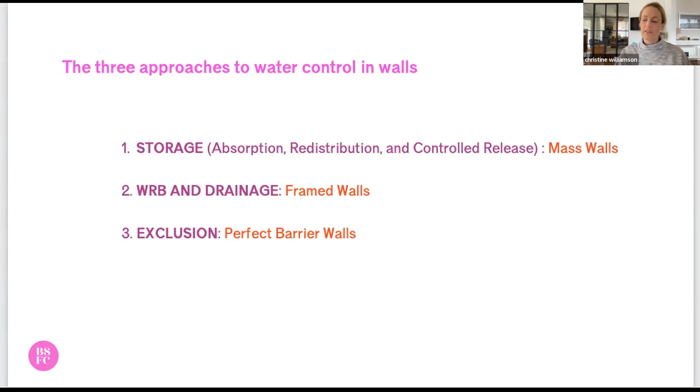With respect to storage, this approach involves the wall absorbing water, redistributing that water, and then releasing it by drying. This is how mass walls manage water. The mass wall gets wet, has an enormous capacity to store and redistribute that water safely, and then dries in both directions.

This is not so much in Philadelphia, but places like Florida. Coastal regions will do this. It's a little bit more common, even residentially.

And then, of course, we have fairly common composite walls with combinations of different kinds of stone and block. These walls are very durable. They are also heavy, like they literally weigh a lot. And they also tend to cost a lot, in part because they are so heavy. We seal windows, doors, and service penetrations to the exterior surface.

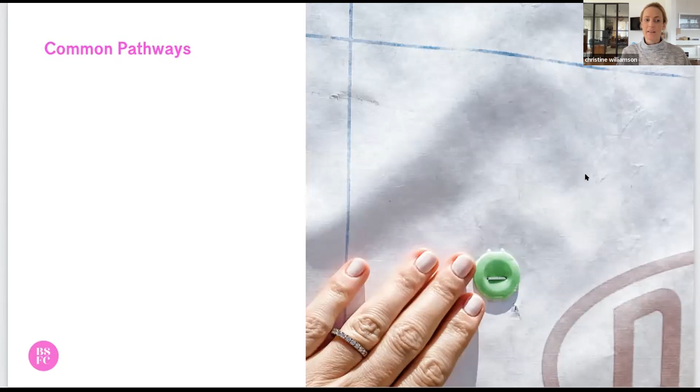Okay, common pathways, we talked about these. We don't have to picture them, although I will show you some. So fasteners that hold the WRB in place, fasteners that hold the sheathing in place, fasteners that hold the cladding in place. Most of these are not sealed.

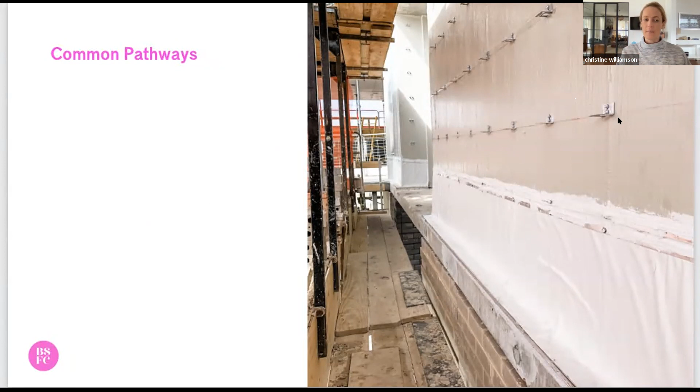We do not seal these. You could, I mean, some of them you could seal, every one of your brick ties. I don't think you should, but you could. A lot of times our claddings are blind fastened, so we can't even see them to seal them if we were to. Brick tie, what it looks like. Some people don't know.

Okay, let's talk about this third category here, common driving forces. So gravity is pretty obvious, right? If we've got a horizontal surface, like a low slope roof, and we have a hole in it, some penetration wasn't flashed properly, or a skylight wasn't detailed properly, and then it rains, that's pretty obvious. The force that drives water along that pathway is gravity.

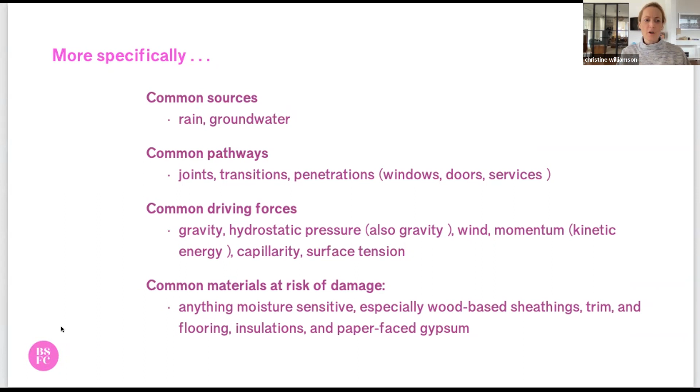So we get that, but some of these others are a little bit less obvious. Let's start with surface tension. This is the tendency of water to stick to a surface. The most common architectural example of this is water tracking back horizontally along a soffit or some architectural detail rather than dripping straight down due to gravity.

Typically this isn't a mechanism that causes most leaks, when we're talking about real failures of that kind. But we tend to care a lot about surface tension when it comes to stuff like staining. This comes into play.

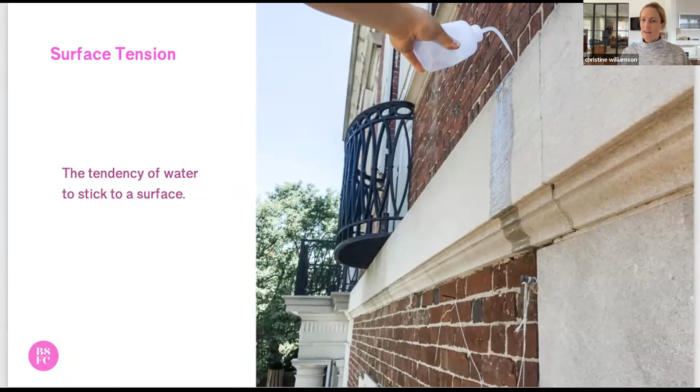The next driving force that's a little bit less obvious is capillary movement. It is the movement of water within the confined space of a porous material due to the attractive force of surface tension. So capillary action is actually a form of surface tension, just in very small spaces.

An example would be to dip a paper towel into a cup of water and watch the water wick through the paper towel. The same thing happens with all kinds of building materials, particularly cementitious building materials like brick, stucco, concrete, mortar.

Incidentally, it is also what brings water up to the tops of trees, right? Probably the first time you learned about capillary movement was in elementary school, learning about photosynthesis and trees and all that kind of stuff. So water from the ground will wick up through the roots and the trunks and the branches all the way to the tops of trees.

I find thinking of trees particularly useful when thinking about capillarity, because not only do we build with wood, we also intuitively know that trees can be very tall, which is a powerful indication of the magnitude of capillary transfer. We should not underestimate this. This is a very effective way of moving water from one place to another, and it's very common in the materials that we build with.

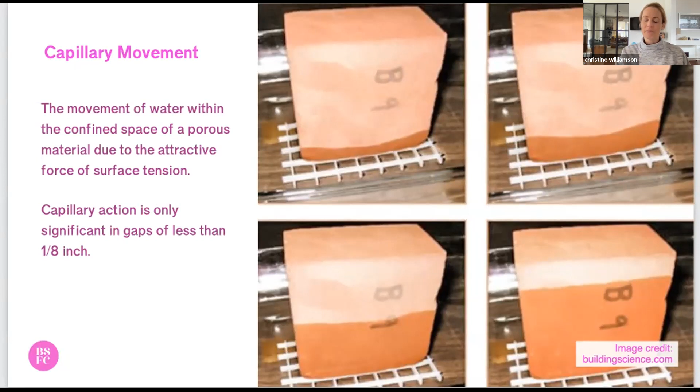The big money one, this is the concept that I wish architects had a really good handle on. I think it would help them a great deal professionally, is hydrostatic pressure. It is an extremely important transport mechanism for liquid water. You'll want to take some time to understand this, but it only seems complicated, don't worry.

So hydrostatic pressure is actually really gravity. It's just sort of a special kind of gravity. It is the pressure that water exerts against a surface when it is held up against that surface.

In order to determine specifically what that pressure is, there is an equation. You will not have to do the math, but it does benefit you to see it. Pressure at any given point on the dam is equal to the density of the fluid, times the acceleration from gravity, the gravitational constant, times the height of the column—so where we are vertically on that dam.

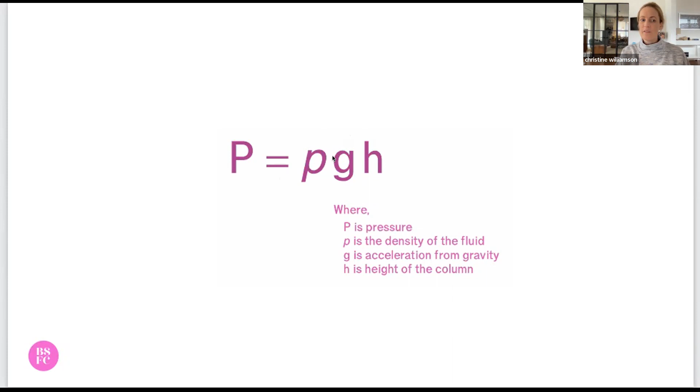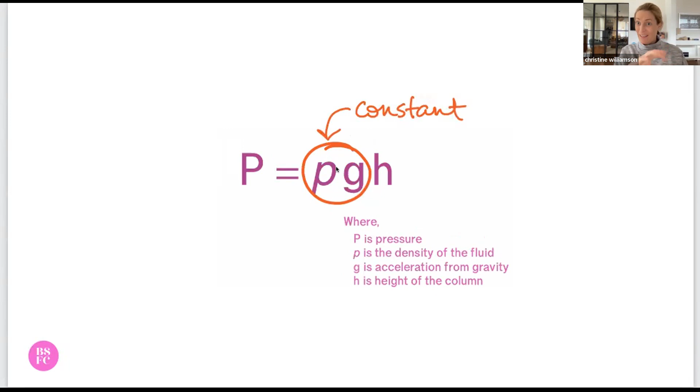You'll notice something interesting here: two of these things, at least on Earth, are the same. We know the density of the fluid we're most concerned with, water. We know the gravitational constant. So the only variable in this application that really varies is the height, where we are on the dam. What's kind of neat is that the pressure is entirely dependent on where we are expressed vertically.

So the size of the lake doesn't actually bear on the magnitude of the pressure at all, but the depth of the lake does, which is crazy, right?

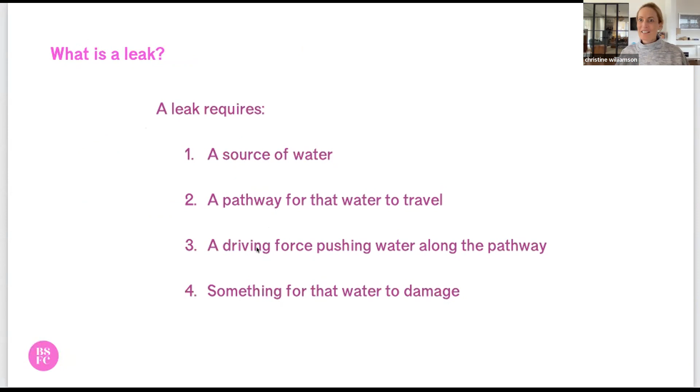Now, in most applications, the volume of water we're dealing with obviously matters. If we go back to our leak, we can have a source of water, a pathway, and a driving force, all three of these things. But if the source of water is very small—if we have a pathway and a driving force, but our roof leaks, say a skylight that hasn't been finished yet, and we get a very light, brief rain—that's obviously less of a big deal than a downpour. So the volume does end up mattering to us, but it doesn't affect the magnitude of the pressure. It's just the height.

So what this means is that the pressure Lake Mead exerts on the Hoover Dam, one inch below the surface of the water, is the same as the pressure my water exerts on the plastic bottle one inch below the surface. Isn't that crazy? It's kind of nuts. That part's not intuitive to me.

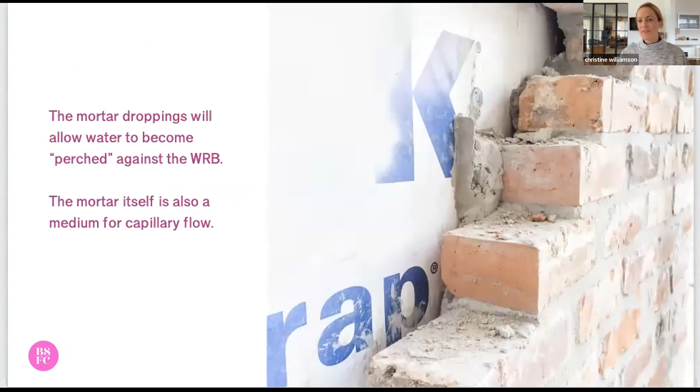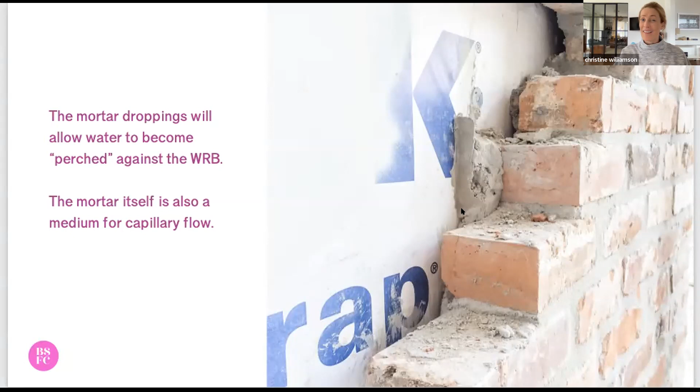But anyway, architecturally, how does this end up mattering to us? It matters in stuff like this, and this is where we'll come back to our drained wall in a moment. When we have a cladding and a space behind it, and that space is for some reason clogged up, we allow water to become what's called perched against our water control membrane. And when we do that, hydrostatic pressure develops—the more water we allow to become perched, the more pressure driving that water to the interior there'll be. We permit, or we provide, a driving force to bring water to the interior of our buildings.

In this example, we've got a masonry veneer with a very standard residential one-inch cavity behind it, with a mechanically attached water control membrane. You don't see it in the photo, but we can presume we've got a wood-based sheathing like OSB, wood framing, cavity insulation, and painted drywall on the interior. So we have all of these things in that example.

We've got a source of water, rain. We've got pathways—what are our pathways? We've got capillary action, or porous materials here that have pathways. Then you can kind of see the cap nail that's holding the sheathing in place, and we don't see it here, but I think maybe there's brick ties as well, or other pathways.

Our driving forces are capillary action through the brick itself and through the mortar, which will deliver water from the face of the brick to the back side of the brick. Then we've got this mortar in the middle that does two things for us: one, it's a medium for capillary flow, and the other is that it allows water to become perched and produces hydrostatic pressure, driving water to the interior. And then, of course, we have all kinds of things behind the WRB that can be damaged as a result. So yes, we have a problem with this.

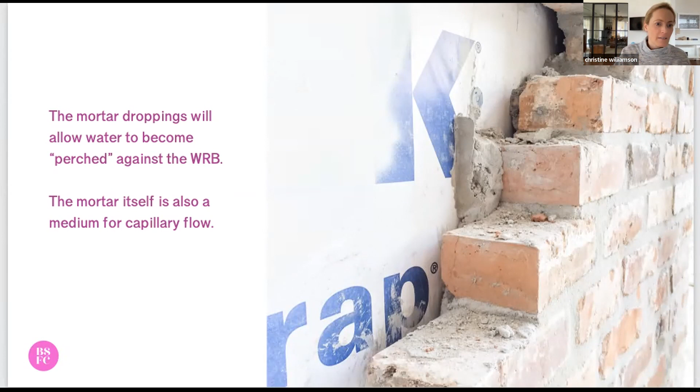And the easiest thing that we could do to make this wall work is, of course, to make this space actually clear. It's really hard to do that residentially when we only have a 1 inch cavity. Commercially, let's see if I have a picture of a commercial wall. The cavities tend to be larger, 2 inches. In my experience, it's pretty reasonable to ask a mason to keep a 2 inch cavity clear. They can do that pretty well. But in residential construction, keeping a 1 inch cavity clear is very, very difficult.

So I recommend that all my clients use either a drainage mat in there, most typically, or a textured building wrap or something else to give us a little bit of a space for drainage and drying.

Now, I'm going to show you some examples very quickly, because I want to leave lots and lots of time for questions. I'm going to show you 2 more things and then questions and discussion, not just questions, discussion too. I'm going to show you some examples of what stuff looks like when it fails. And then I want to talk about our 3 strategies again in the context of what we've just gone through.

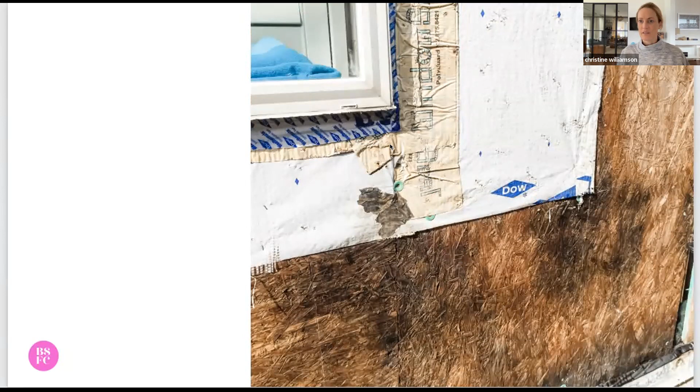So this is what insufficient drainage and drying looks like. This is a townhouse in Houston. It used to have a stucco cladding on it, and there just wasn't enough drainage. It was a code compliant building, just not enough drainage. It was so wet, and this was after approximately 5 years. It's pretty much just disintegrated. This was not a leaking window. This problem was not how the window was flashed or installed. The problem was insufficient drainage.

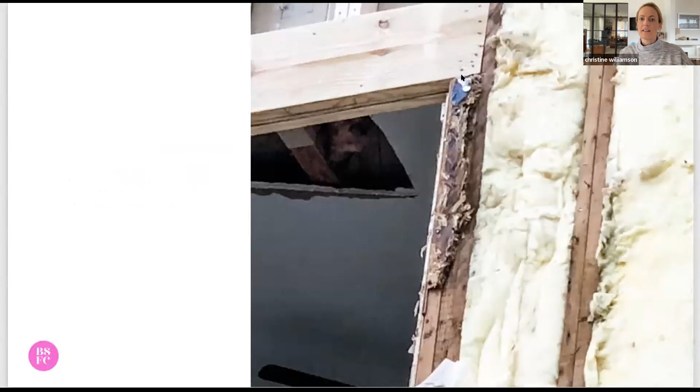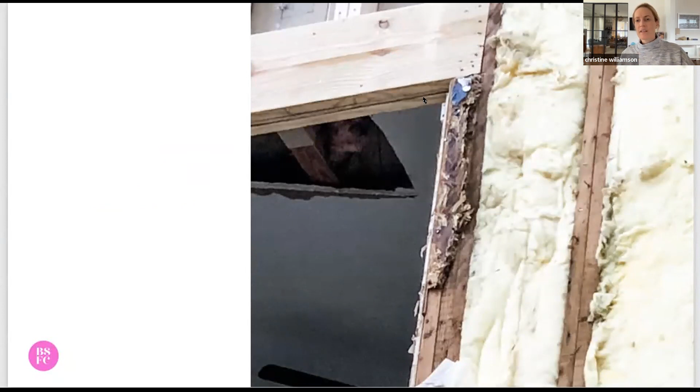So the sheathing was completely rotten, and you can see, this is a closer view. You can see a little, this is the clearly visibly wet OSB sheathing and a tiny little square of building paper left over. I've been using this example to teach with for a long time, and I actually ended up socially meeting the owner of this. And what's crazy is they went back, because my dry cleaners is there, I kept track of it. When they were repairing it, they repaired it with the same system that failed, with insufficient drainage.

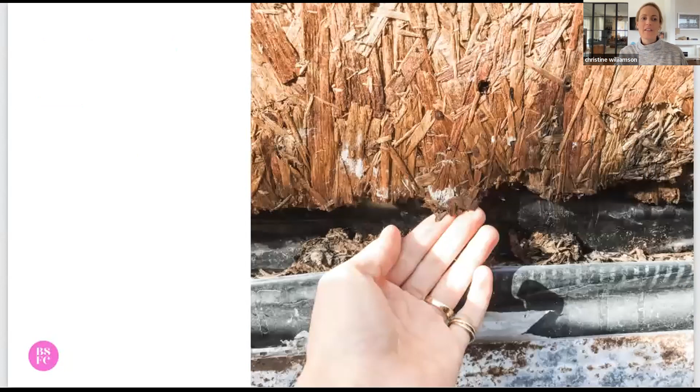It's that the building code requires only 2 layers of building paper, and that is not enough drainage. So the first layer of building paper required by the code is the water control layer. And the second layer of building paper is designed to give us just a little bit of a gap for drainage and drying. That's a huge source of misunderstanding, by the way, in our industry, where we sort of assume, oh, well, we have all these failures, it must be that the water control layer, there's something defective about the installation of that WRB. There's nothing wrong with the installation of the WRB. It's this. It's driving forces.

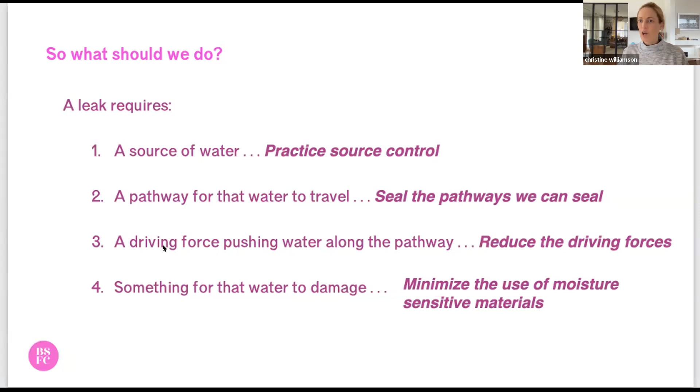We have a water control membrane that would work fine. And in fact, there is no commercially available water control membrane that is robust enough to resist hydrostatic pressure. We have to do all of these things on this list. We cannot just do one of them. Dealing with the driving forces is part of our responsibility. Our WRB cannot work properly unless we deal with these driving forces. So these two layers of building paper, we don't have the second layer because the first layer isn't up to the task. We specify the second layer to deal with the driving forces, to give us a space for drainage and drying.

And that brings us right back here again. I'd like to point out that one of the biggest things people miss with these three approaches, and in particular this drained approach, is that they fail to see this as a system.

This is a system. Our WRB is not designed to work by itself. The system depends on having a water control membrane, an airspace for drainage and drying in front of it, and a cladding that sheds water. All three of these things participate in the water management of the system. The WRB isn't there because our cladding isn't up to the task.

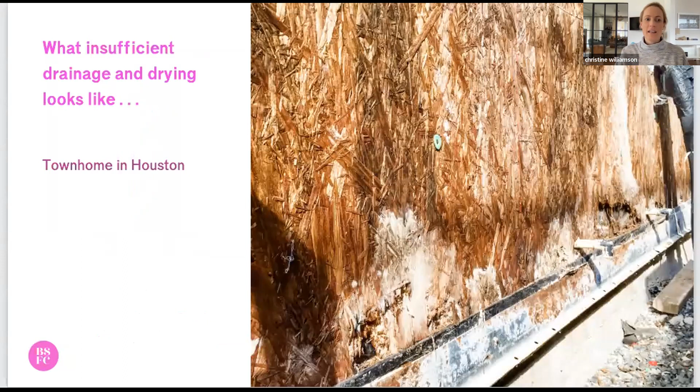These failures are not installation failures from crappy stucco installers or whatever the cladding system is. Cladding isn't designed to be a perfect barrier to water. In a drained assembly, we're dealing with a system, and paying attention to each component of the system is extremely important.

That's really what I want to leave you with. I think it's the most natural, practical application of this. So now I've taken you here, and the first thing I would ask is, okay, I know I need a WRB, we got that, I know I need a space for drainage and drying. How big a space do I need?

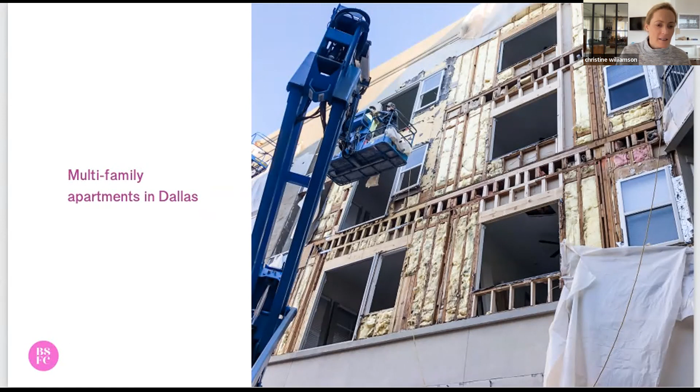That's a much more complicated question, and it's one we don't have time to fully explore, so I'm going to give you some rules of thumb to help. Let's see, give me just a moment to find the slide that summarizes it for you.

Okay, so how much of a gap do we need? In climates that receive 20 inches of rain or more per year, and on buildings more than 2 stories, I recommend a clear space of about 1/4 inch behind reservoir claddings like brick, stucco, and adhered stone. Reservoir claddings are those claddings that hold a lot of water.

Vinyl siding, for example, is a non-reservoir cladding, and a metal panel is a non-reservoir cladding, but cedar would be a reservoir cladding. Any kind of unpainted wood would be a reservoir cladding. 3/16 inch gaps work nicely on lower exposure buildings and on non-reservoir claddings, so panel and lap sidings. In buildings with exterior insulation, I recommend a 32nd of an inch behind the insulation, or using a drainable insulation, and an 1/8 to 1/4 inch in front of the insulation. This is my general rule of thumb.

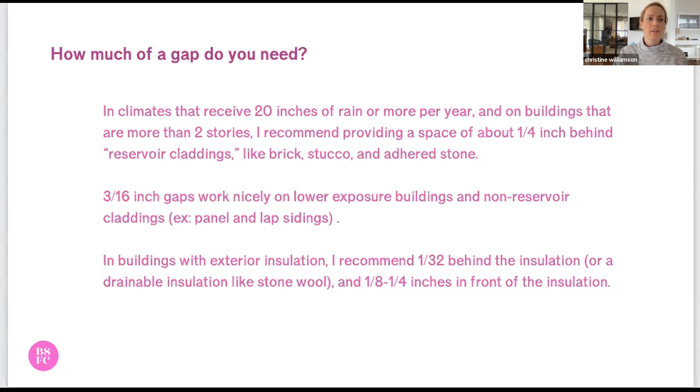This is a more complicated question, and I'll tell you why very briefly: we don't actually need a very big space to deal with hydrostatic pressure, we need a very small space. What we tend to need when we need a bigger space is actually usually for drying.

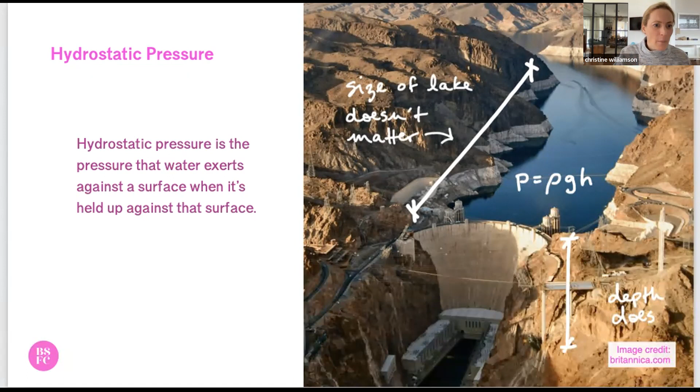When we have reservoir claddings, what we like to see is drying into this cavity by both the cladding and the wall, and a bigger cavity provides more drying. There are a few factors that affect this, and we don't have time to explore all the options here, but that's why reservoir claddings tend to require a larger space, because we want to dry them out into the space before the sun comes out and drives all that water vapor into our walls. But again, that's for another day.

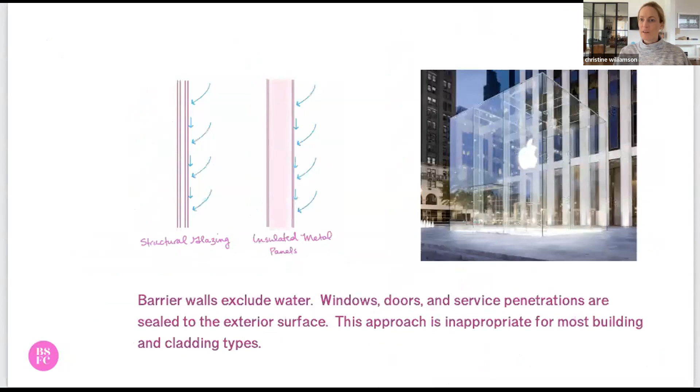What I really want to leave you with is the importance of understanding our three approaches to water management: mass walls, drained walls, and perfect barrier walls, understanding them as a system of water management that is dependent on the rate of wetting, the rate of drying, and the capacity for safe storage. Achieving the right balance requires attentive design and a nuanced understanding of how our walls actually perform in service.

And with that, I'd love to open it up. I'm going to stop screen sharing, I might share again if you guys have certain questions, but I want to look at the chat. Eli, maybe you want to MC this section here. How do you want to handle discussion?

Absolutely, I'm happy to. I think one question that was coming up was about exit strategies, which you started to talk about at the end, and in addition, how do you get drying? You talked about both top and bottom. Can you talk a little more about those exit strategies and approaches?

Sure, yeah, okay, so now I will share this again. Let's do this, see if it's exactly where it is. Yes, okay, so we've got a space behind our cladding for drainage and drying.

Well, now what do we do? Now we've got this clear space. How do we actually get that water back safely to the exterior? We provide what's called through wall flashings.

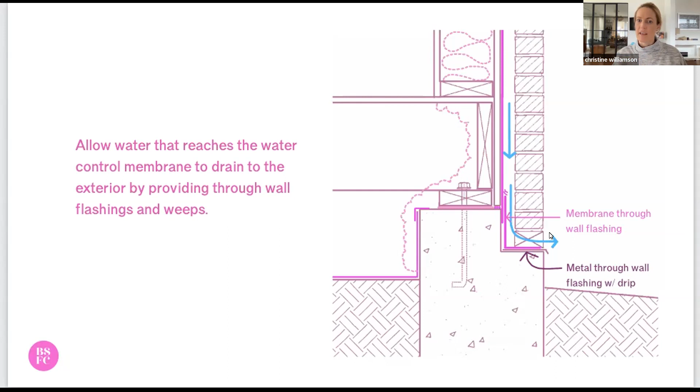When we have a brick veneer, we provide through wall flashings. My favorite approach is to have a metal through wall flashing, a combination of metal and membrane. This membrane strips the flashing to the face of the water control membrane, and I let water drain out. This X'd out brick is called a weep and a vent, which does both things. It allows water out and also allows air in.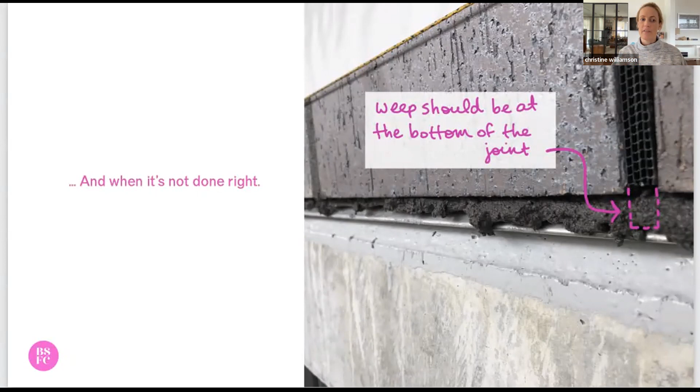Typically we don't handle this with the care that I see here - this is not rare, but often through wall flashings aren't done as well. Residentially, we see a lot of this, where you get some weeps and you're using whatever this is - polyethylene, or sometimes visqueen, some sort of plasticky material that doesn't bond super well to the mortar, so you get a little bit of drainage there. This will drain, but it's pretty sloppy, and I don't like relying on it. It does work, but it's sloppy.

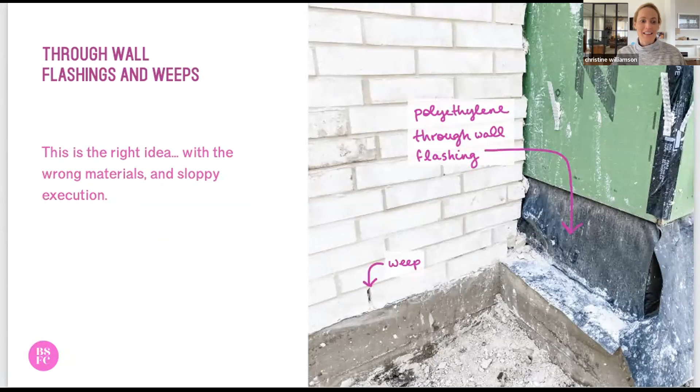People also tell me they don't like the look of this. A lot of architects say, I don't like the look of this, it's so industrial, and I agree - I don't like the look of this either. But compared to what? Most of the time, we're not actually doing anything at all. If you actually start looking at this stuff, there's so much ugly stuff out there. We just don't see it because there are shrubs here.

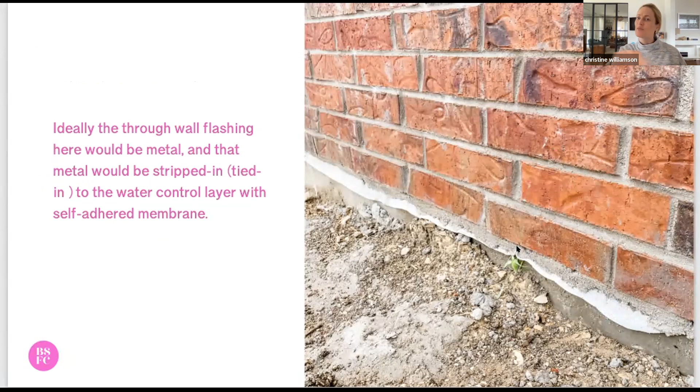Anyway, the worst through wall flashing is no through wall flashing at all. And the joke is: weep now or weep later. Sort of cheesy, but you can see here, there was no through wall flashing designed in this wall.

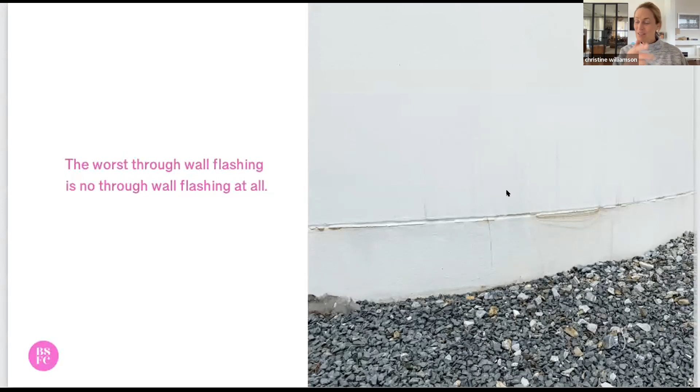There's a whole bunch of water in this building. This is a house that did not find its way out. Guess where that water is? It's rotting and molding that house. So yeah, weep now or weep later.

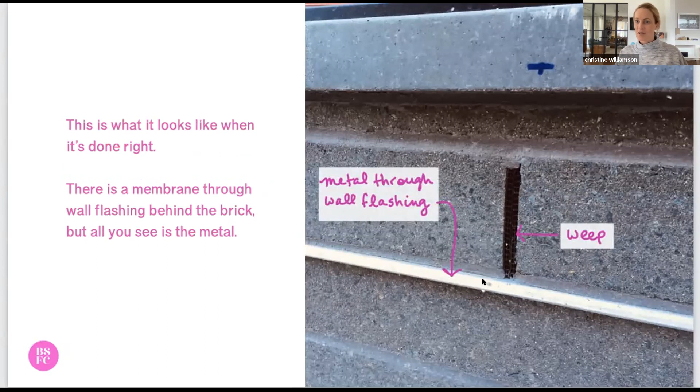But there's stuff to be done to make this more architecturally appealing. You don't have to use stainless steel - you can use other metals, painted aluminum, or copper. There are ways of designing this to make it look less industrial. But for goodness sake, we can do better than this and this.

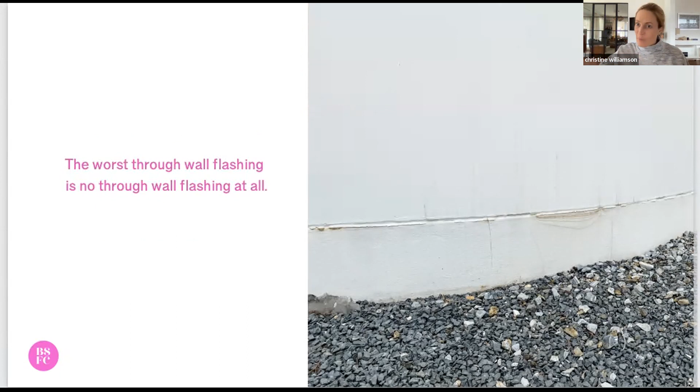The second part of this is getting water out from behind our claddings. Often this is really easy.

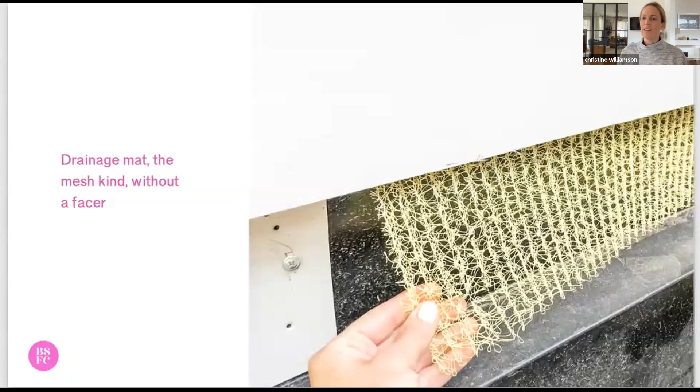Like with a panel siding, the photo is a little washed out, but this is a panel siding and a drainage mat behind it. It's just a little bitty metal through-wall flashing piece with a drip that lets water out. It's very subtle, you barely see it. That's this here. When the next panel is installed, you have to be a real geek looking for it to even perceive that it's there.

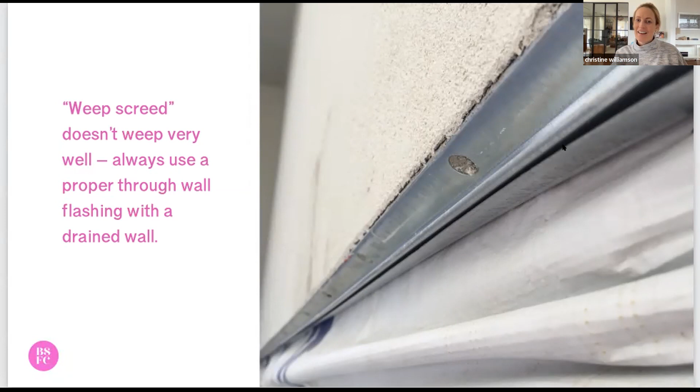With stucco claddings, I don't like to rely on the weep screed because it gets filled with mortar. So I treat the weep screed just like a cladding termination, and I have a separate through-wall flashing here. You have to get on your belly to take this photo. So these things are usually pretty subtle. Or this one doesn't even have a drip edge.

It has a drainage mat behind the weep screed and it just drains. We're not dealing with a lot of water - we're dealing with enough water to damage our wall, but not enough water. We're not gushing out here.

So we just need to take the edge off. And then of course, at the top of the wall, I don't have an image to show you, but I do have a sketch. The best approach is to not just provide weeps, but to also provide vents - some sort of air outlet at the top.

Now in brick, we use the very same weeps that we use for drainage are also vents, and we put them in at the top the same way. It's pretty easy, very subtle, but there's lots and lots of ways to approach this with other cladding types. A lot of times it happens without us even specifically designing it.

We only need very small spaces to get good air exchange behind many of our claddings - like a 1/16 of an inch, a 1/4 of an inch. We don't need a very big space to make this happen, we just need to take the edge off. The critical part is making sure that this space is clear. That's where we tend to struggle the most.

So a question about the code - you mentioned the project in Dallas that was code compliant, yet the system itself was insufficient. That's the code in Philadelphia too. So how does that code change? What kicks off a code change that could update that?

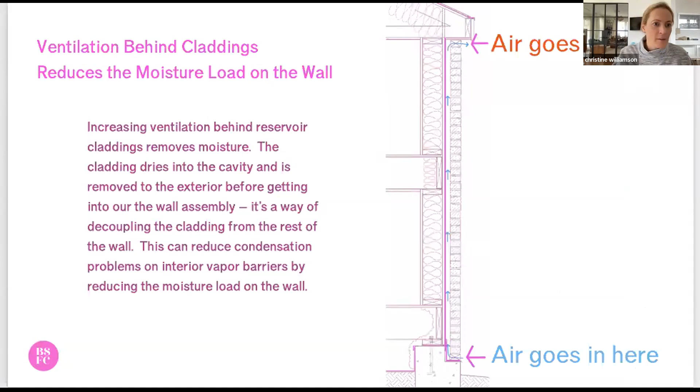Okay, so it depends—it always depends. Are we dealing with a full mass wall that's been stuccoed, or just a veneer that's been stuccoed? Stucco is actually a really fantastic water management tool. Historically—let me share my screen again—there's absolutely nothing wrong with this. Often we put stucco renders on solid masonry walls.

You see this all over Europe, and they're doing it as a water management tool. They'll put the stucco on the solid masonry wall using less expensive masonry. We picked the stone specifically for this very special building, and we want it to look amazing forever. But a lot of masonry buildings just need to stand up—they're not churches, museums, or art galleries, these institutional buildings we invest in that way.

As a durability measure, we'll put a stucco render right on top, and then redo the stucco all the time—every 20, 30, 40 years, whatever it is. There's nothing wrong with that. And painting the stucco as well reduces how wet the wall gets in the first place.

So suppose you had a masonry wall that was in bad shape and you wanted to insulate it from the interior, but you were worried about how it was managing water on the exterior. One strategy would be to reduce wetting by applying a stucco render as part of your retrofit. You can do that on a veneer wall too, and it will reduce wetting, particularly if it's painted.

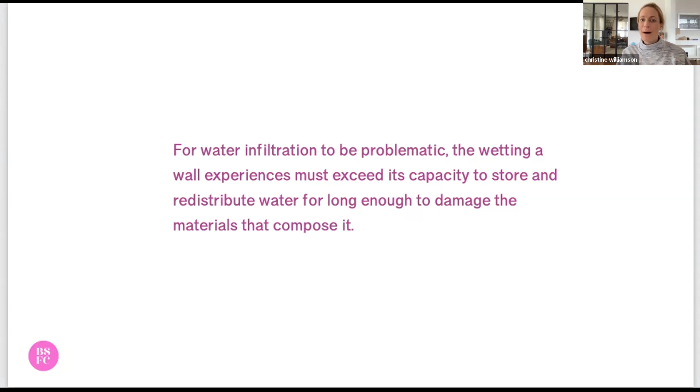This is what we're doing—wetting, drying, and safe storage. But you can't just reduce the wetting with a veneer wall; you still have to address the underlying issue of drainage behind your veneer. So it depends on which of these: is this a mass wall that's got stucco, or a veneer wall that's been stuccoed? If it's a veneer wall, your stucco might take the edge off some of the wetting, but it's still a reservoir cladding and a drained assembly that depends on having a space for drainage and drying behind it.

This is a really hot topic in historic neighborhoods too. I live in one, and there's always people who lament anybody who paints brick. I think it's outlawed in my neighborhood. My house isn't brick, so I haven't paid attention, but people will say painting brick is bad for the brick. It's not bad for the brick. You might not like it, but that's a different argument.

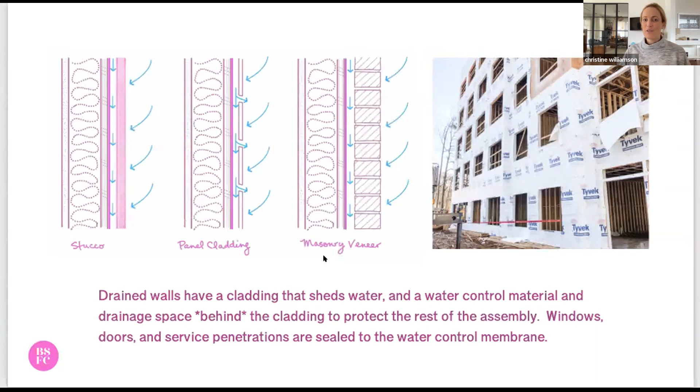If you paint brick, it does reduce how wet that brick will get and how wet it will stay. You have to use a vapor open paint, because your paint will not be perfect. You will get water behind your paint, and it will need to dry in both directions. When it dries out, it will blister the paint or coating if it's too vapor closed. Now, if there are other reasons to debate this - if you start painting or stuccoing over something, you've created a new thing you now have to maintain, and that may not be desirable. It might change the character of the neighborhood in a way you don't like. There's plenty of other reasons to debate this, but as a water management strategy, it can be very effective.

So getting to Libby's question on 18th and 19th century buildings - I wish Zoom didn't move the chat every time the screen stopped sharing.

Looking for resources for studying 18th and 19th century buildings that have been documented with leaks - any books, articles, sources that talk about how water and large scale, specifically brick buildings, interact?

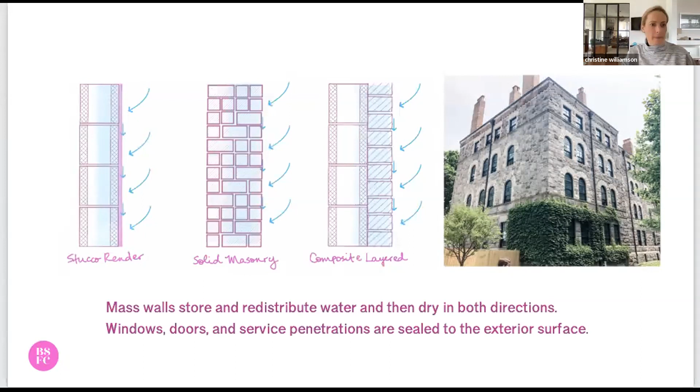I showed you this earlier in commercial construction. So commercial construction, our code requires 2 inches. Wouldn't it be nice if we could use some of that real estate for insulation? Because if we want to add 2 inches of exterior insulation, and now we also have to have 2 inches of cavity, we've got 4 inches.

So now we're offsetting our brick, not just at our windows, but everywhere. That's really expensive, and it's a huge thermal bridge. So we don't really need that, the code says it, but it's sort of a moot point for us now because we're not using very much continuous exterior insulation. But if we could reduce this cavity to a quarter inch and use the rest of it for insulation, we would be minimizing the structural requirements that we need to offset our cladding that much.

But yeah, that's going to be the question. I think it's going to be a big issue for us as we start moving into using continuous exterior insulation, it's going to put that question at the forefront. Because we're so used to this, we don't need 2 inches for drainage and drying behind brick. We need vapor control, we need maybe a quarter inch, both for drainage and then for tolerances. We want to be able to get that brick flat, but we don't need the full 2 inches, and it's expensive. It will become increasingly expensive to get that later. But our codes weren't anticipated for this. They're cumbersome, they weren't made to be super flexible. It takes time to change this stuff around.

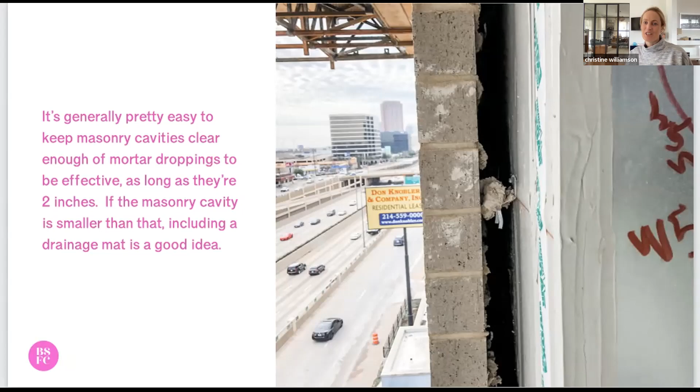Actually, while you were sharing, Richard Gliniak, did you get your question answered in here, or is your question still outstanding? Well, it definitely got a start.

I'm seeing so many stucco bays in my neighborhood, the Graduate Hospital area, where homes were built here 10, 15 years ago. And they're all being taken down, the stuccos, but nobody's putting the stucco back. They're putting Hardie board up. So I'm still at a loss, where did these stucco jobs go wrong? Because they didn't have the proper drainage behind the stucco?

Correct. So the problem is not the stucco. It's not the workmanship, the stucco works fine. The problem is that there wasn't enough drainage behind the stucco. And some of them are too old for this to have happened - we introduced the 2 layers of building paper requirement, I think around 2000. So if these homes were built in the 90s, they might not have even 2 layers, they might just have 1 layer of building paper or none. I don't know, I was still in school then, not graduate school, so it depends on when they were built.

But what we're seeing is that 2 layers of building paper in climates that are rainy is just not enough drainage. And then of course it's exacerbated by other design decisions - townhomes which are 4 stories just get more exposure, number 1. And number 2, anything that doesn't have overhangs, these walls get wetter. A modest overhang on a 1 or 2 story house can reduce water deposition on that wall by like 50%, which is crazy. So if you go to this real clean line, modern look, your wall's getting a lot wetter than it used to. So it's just getting wetter, and it doesn't have the capacity to drain and dry.